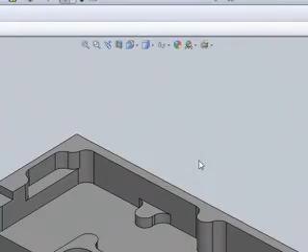If we take a look at the part that we have on our screen, you'll see that this is a typical prismatic part where all the floors and the walls are straight. Either the floors are all 0 degrees or the walls are 90 degrees up from the part itself. You'll also see that there are many different depths within the part, these steps for example, these little pocketed areas inside. What we're going to do is use 3D machining to mill out every single one of these areas.

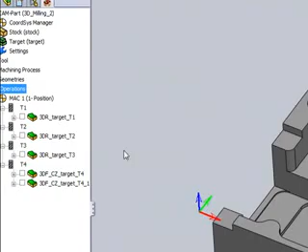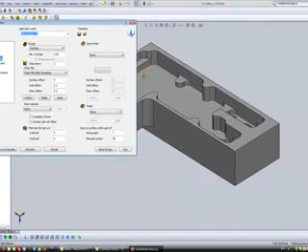In our first operation, we've used a rough cut. If we take a look inside the operation, we'll be using a 14mm end mill. In the technology area, we'll be using contour, stepping down every 3 millimeters and cleaning the flat floors on our way down when we finish going towards the bottom level. We'll also be having a wall and floor offset of 0.2 millimeters.

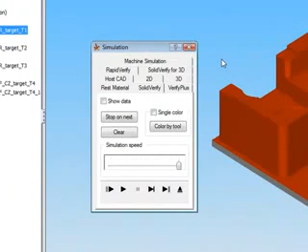If we take a look at our simulation and use the SolidVerify simulation, you'll see that it clears out the part and does as much as it can for this size tool, taking out a large bulk of the material.

Now in our next operation, we're going to continue using a rough cut, but this time I only wanted to work in the areas where the previous tool could not operate because that tool was a little too big. If I go into my operation, you'll see that we're using a different tool, a smaller end mill this time.

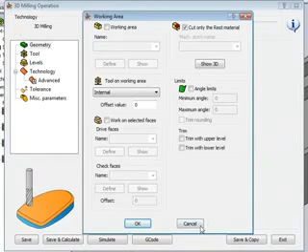In our geometry area, in our working area, we've chosen the option of cut only rest material. That way it'll only work in those particular areas. If we take a look at our simulation, you'll see that it's now only working in those particular areas, where it could not go to at all, and cleaning off those corners as well.

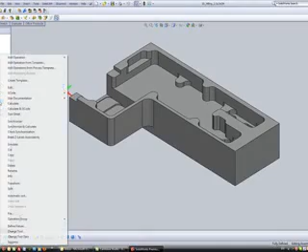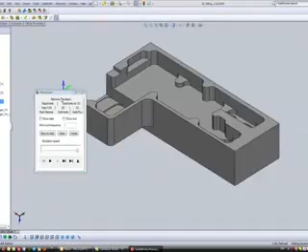We've done the same thing with our third operation, also using a rough cut but this time an even smaller end mill, such as a 5mm end mill, using the same technology as before. Again, in our geometry, we still have our working area using cut only the rest material. Looking at our simulation, you'll see now that it'll only work in those particular areas.

And if we turn the part and look inside, it'll finish whatever area this tool can work on, including this pocket inside, which the other tool cannot do, and only work in those areas.

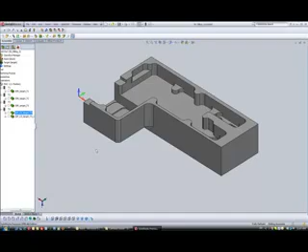In our next two operations, we'll be doing our finish cuts, and when we work on prismatic parts, we will always use the finish options of constant Z, both for the walls and for the floors.

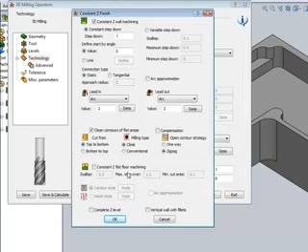If I take a look at my first operation for my finish cut, we'll be using a 4mm end mill, and in my technology for constant Z, we'll be stepping down every millimeter. We will not be using scallop. We'll be having a lead in and lead out of 2 millimeters. We'll also be using the option of clean contours of flat areas. However, we will not use the option of constant Z flat floor machining. We'll use that in a separate operation.

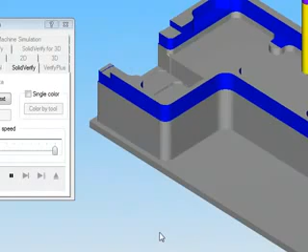If we take a look now at the simulation of the part, you'll see this time that it's actually working exactly on every single one of those walls around the part, stepping down every 1 millimeter. And when it gets to these flat areas, it'll also clean those corners as well, finishing up every single wall that's on the part until it gets to the very bottom of those walls.

Now in our next operation, we'll be again using constant Z with the same tool, but this time if we take a look in our technology area, we'll be using constant Z using the constant Z flat floor machining option, not using the constant Z wall machining because we've done that already.

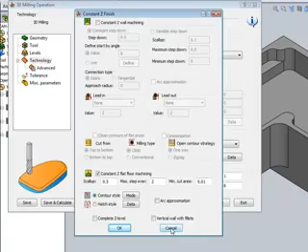If we take a look now at our simulation of the part, this time you'll see it'll work only on the flat floor areas, including the very top of the part itself, finishing off every single one of those areas.